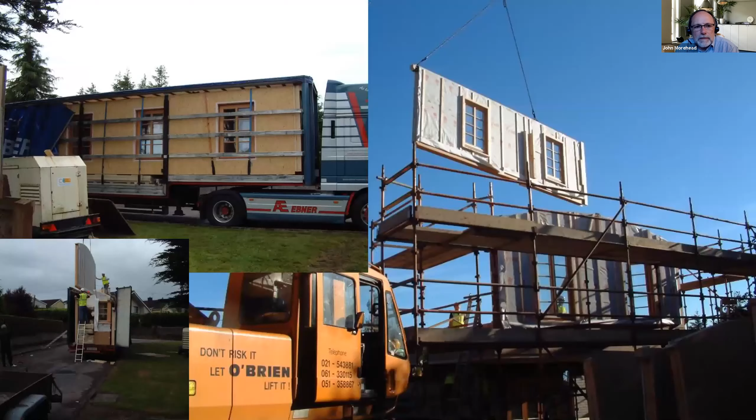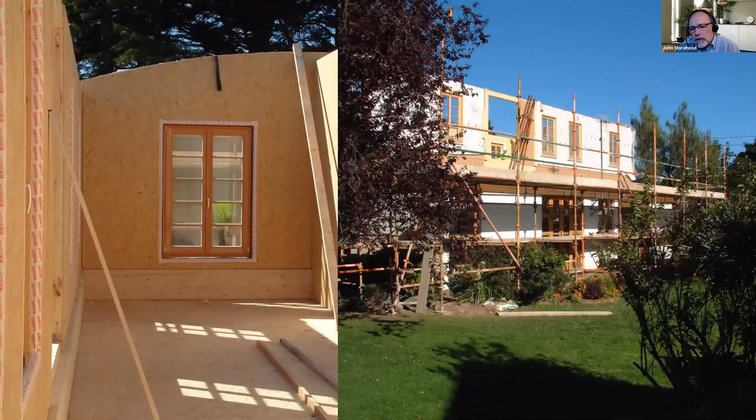It was really interesting. We were trying to get better light penetration into the building, and also look at the whole thermal performance of the building. The Austrian companies were very advanced, very knowledgeable, and introduced me to many hygrothermal principles. Airtightness, as you can see: these windows were installed prior to arriving, all airtight sealed. OSB was the airtight layer on the interior. And we actually had this building assembled in 4 days.

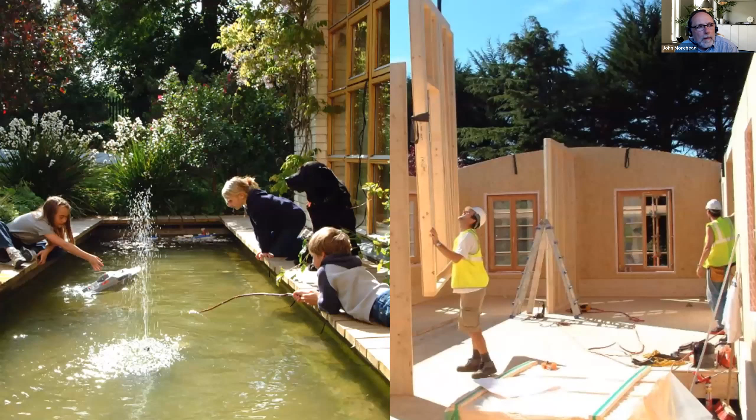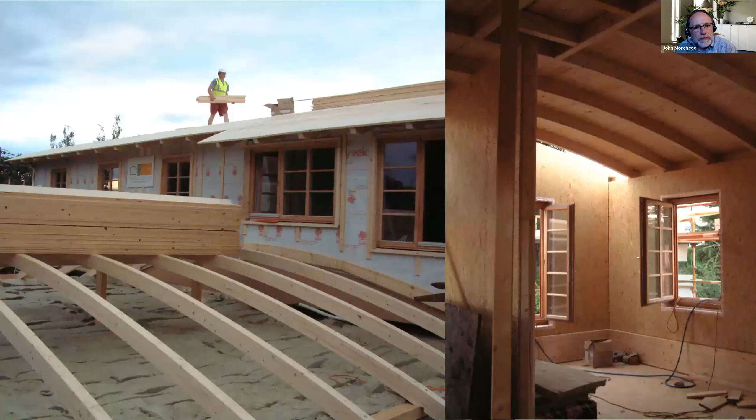It went up really quickly. We built a little pond while we were at it for the kids. A big boss came back over from Austria during the second half of the build. The kids and family went away, and 8 days later this was up and roofed and guttered. Haven't managed to achieve it ever since, but it was really quick. You can see the insulation straight down over the VCL, which is the original roofing membrane, on the single story element, and then the perpendicular 2-story element, which is timber glulam.

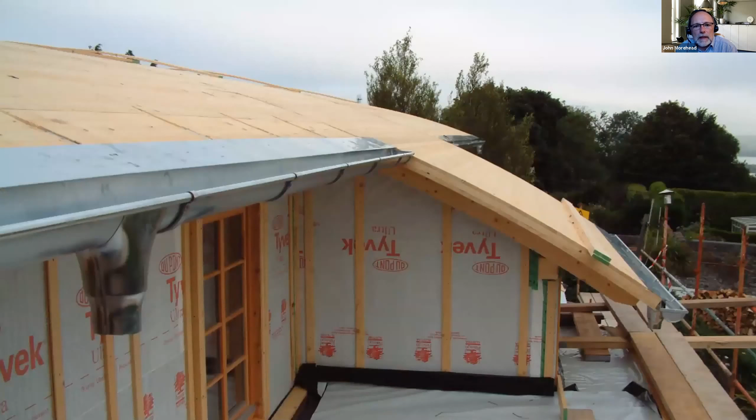Trusses there were insulated from inside with cross battens and then Proclima membranes. I think I might have a picture of that. And here you see sarking boards, the walls already prepared for larch cladding, which we did ourselves, and the aprons in for the zinc roofing on basically the hairy boards which support the zinc, and that's still the way we do ventilated zinc roofs. There's the zinc going on.

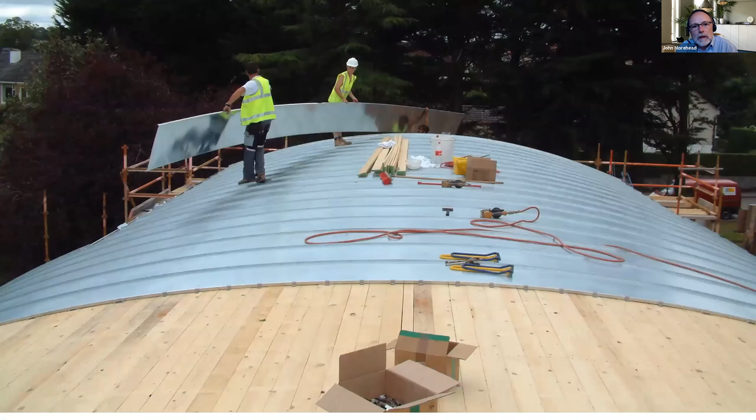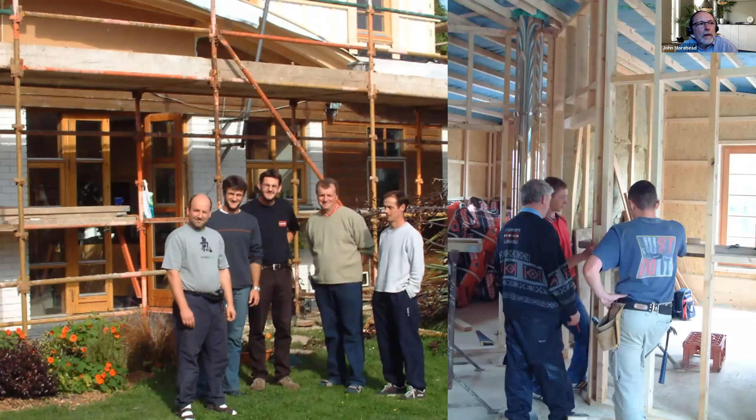We had a press on site, and this is the crew, myself in with them, the main crew from Galway and Austria. As I say, we had the building in and roofed and guttered in 8 days. And we had our local crew fitting out the interior afterwards, and that's the original AVCL Proclima. But you can't deliver any of these buildings, as we all know, in Passivhaus without a really good team, and all these guys added value to the whole process.

So then moving on to around 2003, we were doing an infill project for someone. It was again local. It was on the coast in the estuaries in Cork, not that exposed. It had a northerly view to the estuary and a southerly view into the original river embankment. So we were trying to pull sun in from the back. So it's very sheltered.

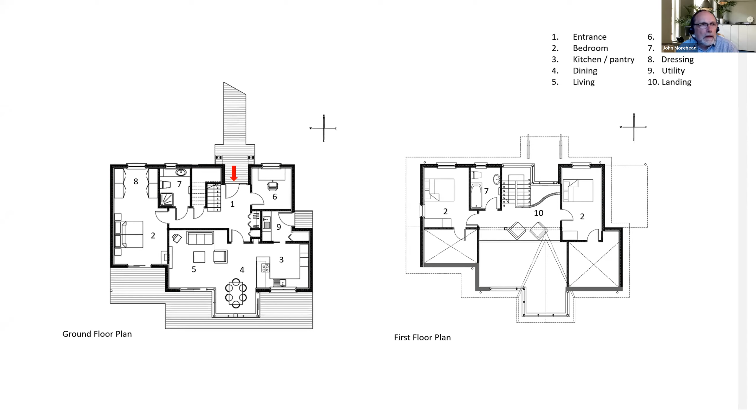With concerns, because of the amount of sun we were trying to pull in from the back, that we might get overheating at the time, we introduced stack effect into the design. So modest house, about 140 square meters. There's our stack effect ventilation built in. And you can see it just dumps on the outside.

And then we pull light into the northerly side of the house, which is overlooking the estuary where there's a lot of activity. High volume spaces we were beginning to understand really worked in buildings that were already quite airtight. The envelopes were airtight and the timber was moisture permeable. It allowed variation in temperatures and solar access during a day.

As you all know, we have 4 seasons in the one day here. It allowed that to dissipate and distribute. So the watts per square meter became very important, the heat load and how that was being addressed and dissipated. Here's the back of the house, a totally different aspect. As you can see, the high level ventilation.

During COVID, that house, which is naturally aspirated and naturally stack aspirated, never went over 600 ppm, which was remarkable. We ran a DEAP 4 calculation on it the other day, and as it is, without any PV, an A3 rating, CPC of 0.48 and EPC of 0.426, with a heating load under Passivhaus of about 17.5. So it wasn't 10, but it wasn't bad. Not bad for, say, 2005.

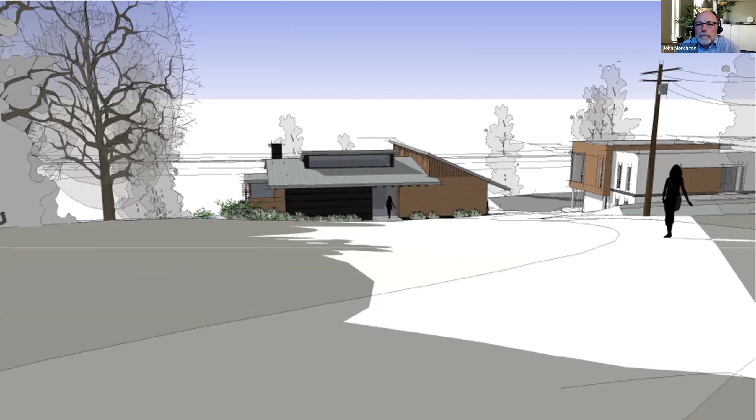This is the project overlooking an estuary, again exposed nicely to the south with excellent views down to the southeast. It's quite steep as sites go, upside down living accommodation with a basement below, which had its own issues and introduced us to hydrothermal issues that we needed to resolve.

We also challenged the building regs at the time, because remember this would have been back in 2009, so we were based on the 2007 building regs, where you had to have a fixed amount of renewables. And percentage-wise, we really didn't need them. We were going to be dumping hot water. We actually got a waiver, which was really good, and fair dues to our local building authority.

It's heated solely by towel rads and one rad in the utility room. The heat load is 9 watts a square meter. There is a post heater, but it rarely comes on. And we have underfloor pipe work, but it has never been commissioned. So the gas boiler that was installed in that house was purely really there for domestic hot water. It has a drying tower integrated with the ventilation system, and that's synonymous with most of our dwellings at this point in time.

But when we found out it was meeting the Passivhaus standard, that was based on Dublin climate data, and there's a whole rigmarole. Many of you know we beat a lot of drums at the time that we needed more climate data files. We ended up getting 4 to include Cork, and of course we do individual site climate files to get accuracy, because with any of these software simulation programs, rubbish in is rubbish out.

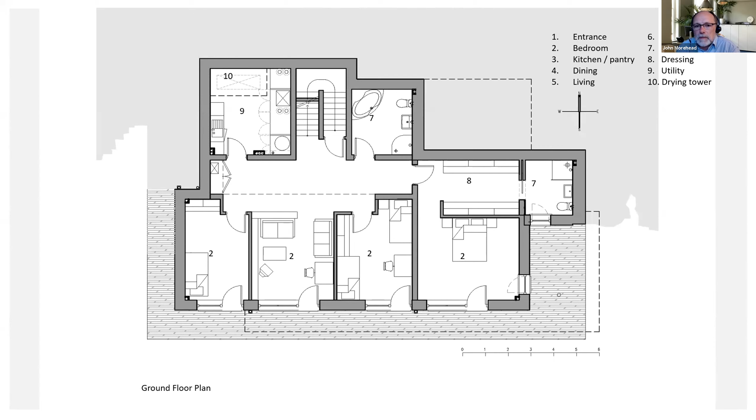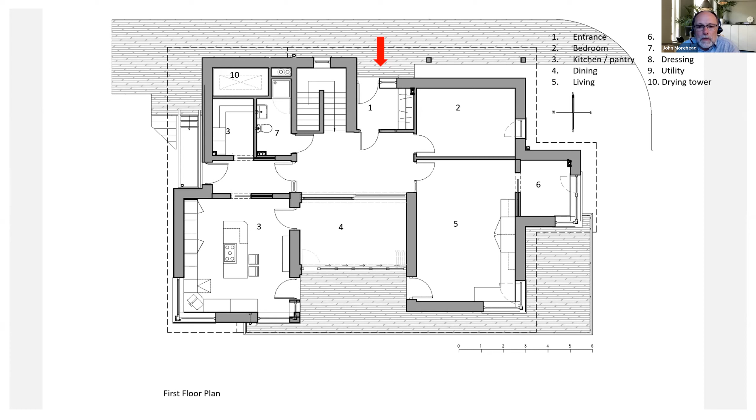Your living area on the right, off which there was a study. There's an interesting room number 2, which is on the northeast of the house, gets very little sun and had a roof light because we were worried about the amount of light getting into the room. And that's known as the pastry room, even though it operates at 20 degrees like the rest of the house does. Surface temperatures in the walls were lower. So we learned something with that. We tend not to use roof lights now, if we can avoid it.

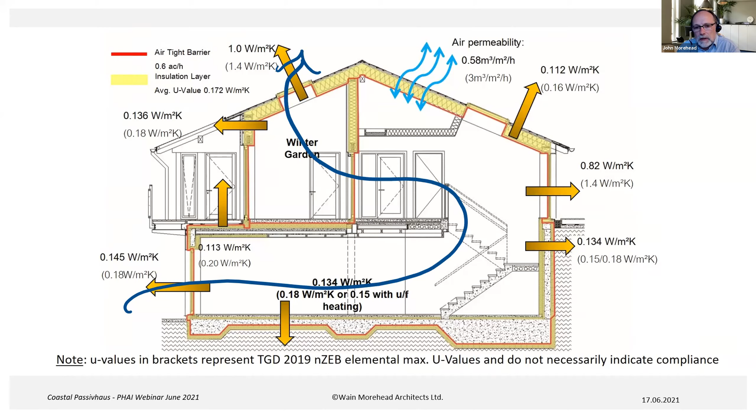On the climate side, climate on the coast is very different. There's a coastal margin that one needs to be aware of. Very good solar access generally on the immediate coastal margin, but as the cloud accumulates inland, it prevents the solar access getting further across.

And the sites, my battery's going low on my mouse. So I've just been told.

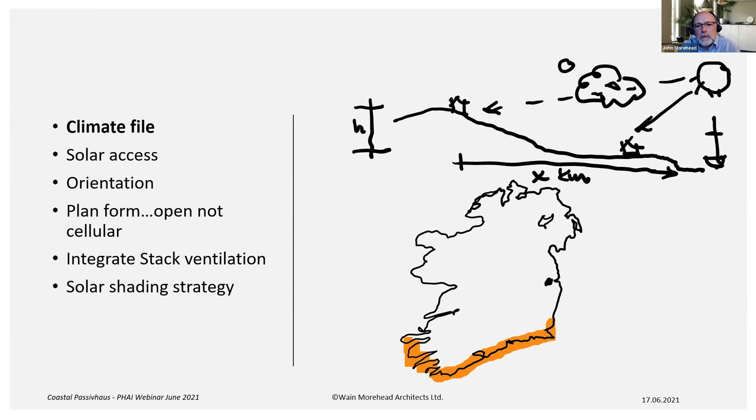Orientation, obviously critical. Generally, you want to be looking out on the sea. So sometimes that can cause difficulties in that there's a conflict between solar access and visual access. Stack ventilation works really well because you can cool off the sea. Another project some of you might see in early doodles for a project in West Cork.

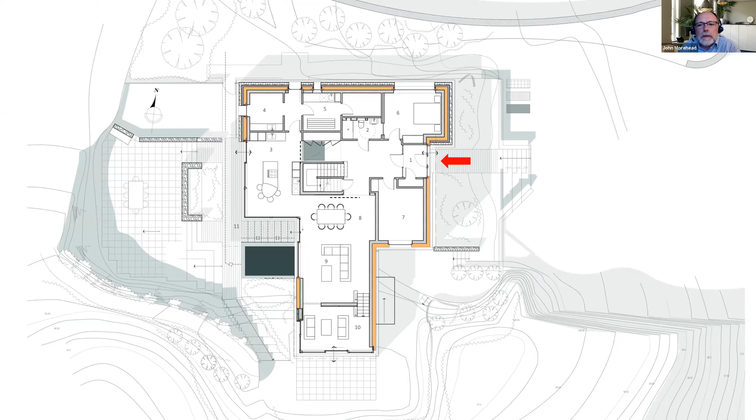All your plant rooms are on the north side of the house, and there's also a guest bedroom and a Jack and Jill bathroom. Number 7 there would be a little study tucked in a quiet part of the house. Upstairs then we have 3 bedrooms with again a communal living area, which has access out onto the terrace, with the most incredible views out to the Fastnet, etc.

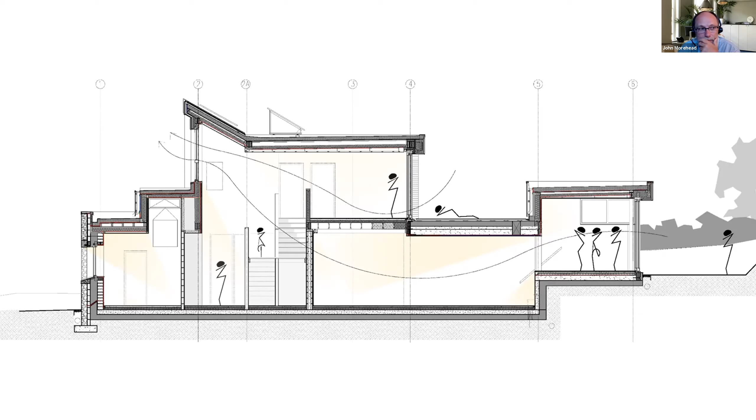We used a lot of stick-built house. We used TGIs. We were introduced to, where the steel is there, that's a Parallam, which is as strong as steel for the same sort of size and reduces thermal bridges.

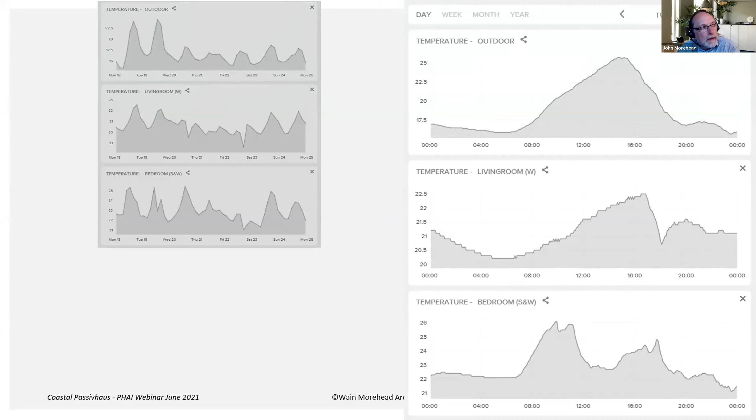We had some issues. On the left, you can see varying temperatures in a particular room, which is the bedroom. And in detail, we had an issue where we had a shed that was supposed to be built, a roll top shed. It wasn't built. We were taking in far more energy through the southwest than we expected.

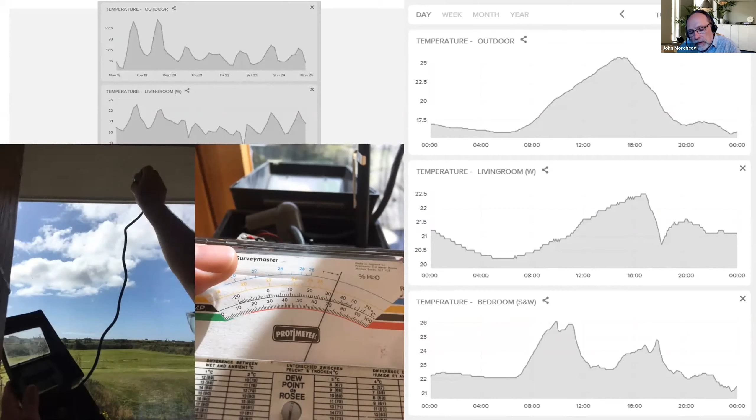We looked at putting in solar films. They were ordered to be put on the outside, but they put them on the inside. And what we're measuring here is 32 degrees surface temperature of the glass on a hot day. So what was happening was the solar film was on the wrong side of the glass and was heating up. So be wary of that.

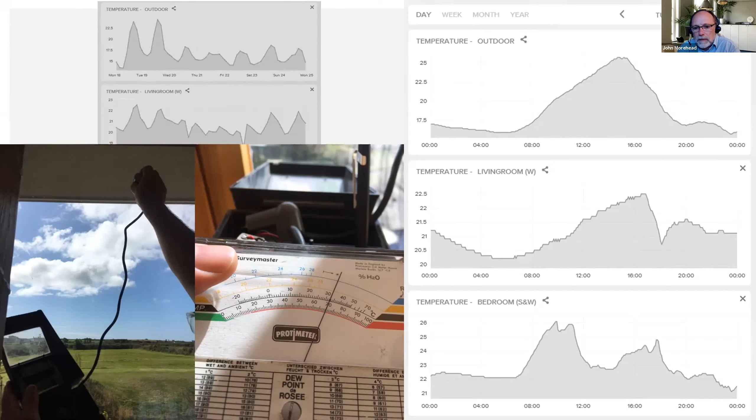We could have done more in relation to that once we knew the shed wasn't happening. We looked at our thermal bridges very seriously on that project. We did a number of different materials because we were building into rock. We got a Y factor, for any of the nerds out there, in BER terms of 0.0262. Again, all this Passivhaus just works within the architectural framework and idiom that we like to use.

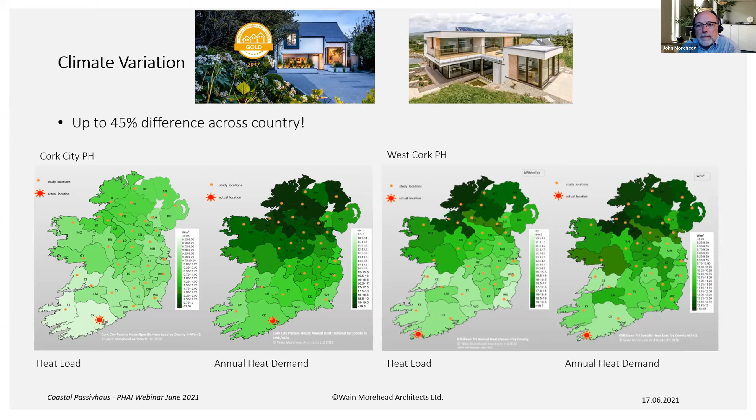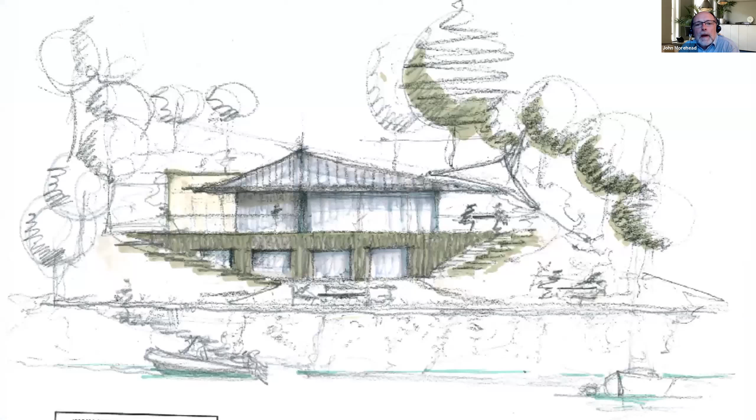It's like a pavilion built into the hill with an unusual roof. It's trying to keep low to stop interfering with views for people walking behind us. It's an amenity area, but this house is looking north, right next to this fort, which is a Georgian fort, and was extended over the years, back into the 1900s with the Navy at the time. And you can see there's rather lovely warmth in the concrete piers, jetties, and embankments. We tried to match that.

Started looking at how we would do it as we built into a hill, and found that materiality was going to become an issue, and it wasn't just Passivhaus, it was NZEB or anything you want, but our Passivhaus experience and knowledge was able to steer us as to how we could achieve a really high performing basement for a north facing house with very little solar access and yet not get condensation.

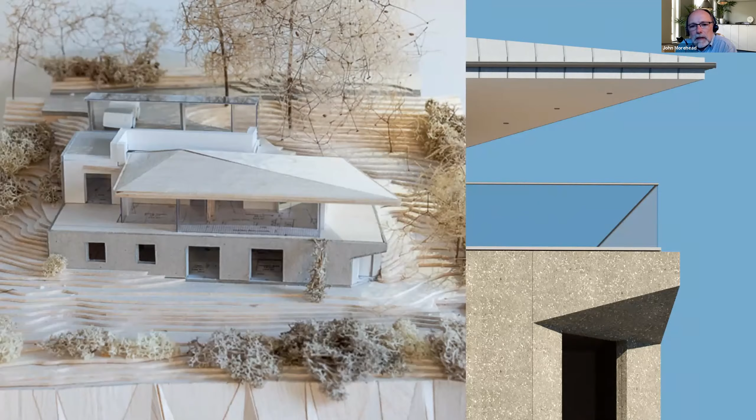This is just a render we took yesterday off our BIM model. And you can see the overall form. You can see, I can get my pointer, maybe, if I can.

No. Okay, failed miserably. Anyway, this is the terrace on the west-hand side, which is getting sun from about April, and really important. The roof covers that area, shelters it in the evening from dew, which can be a real issue near the coast with clear skies. You've got living accommodation on the upper floor, and bedroom accommodation primarily down the lower floor.

Bear with us, sorry.

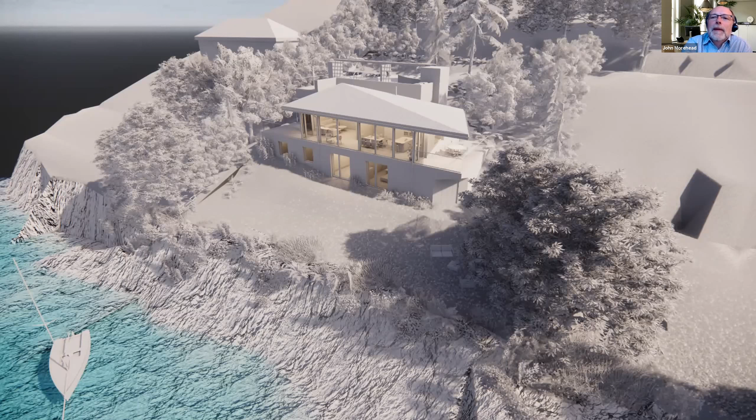Okay, I have an issue here, just bear with me.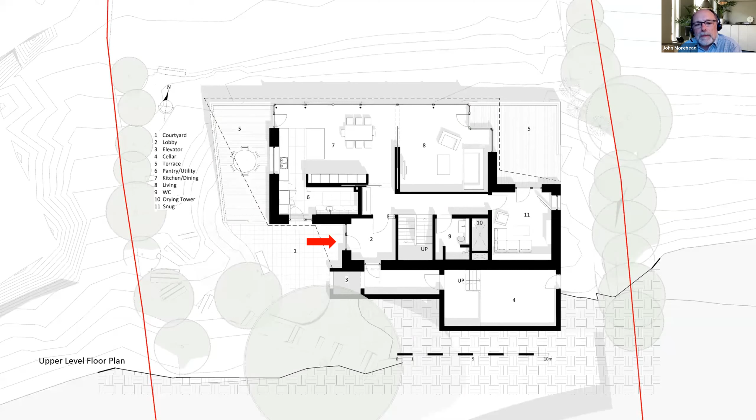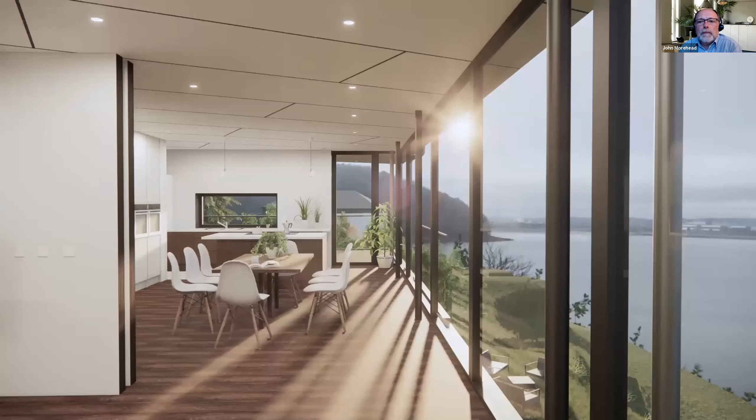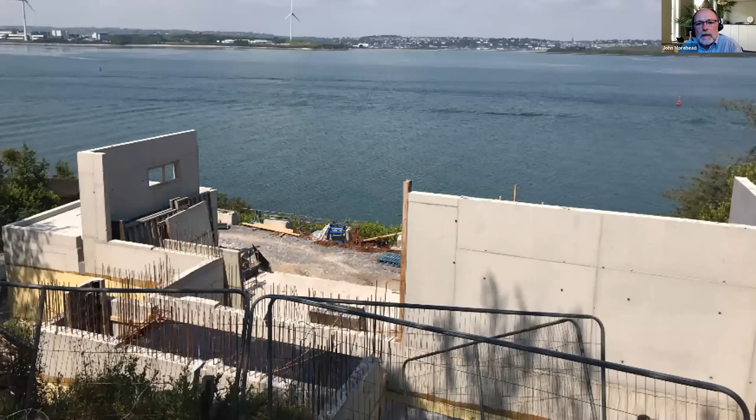Lots of concrete. We managed to get GGBS. The embodied carbon reduction was 23% for the concrete alone by doing that, which saved us a significant amount of equivalent carbon, 12,540 kg indeed. When we worked all that out, it was actually the equivalent to 9.5 years of operational carbon, which was offset by a change in the concrete spec. So you need to look at that.

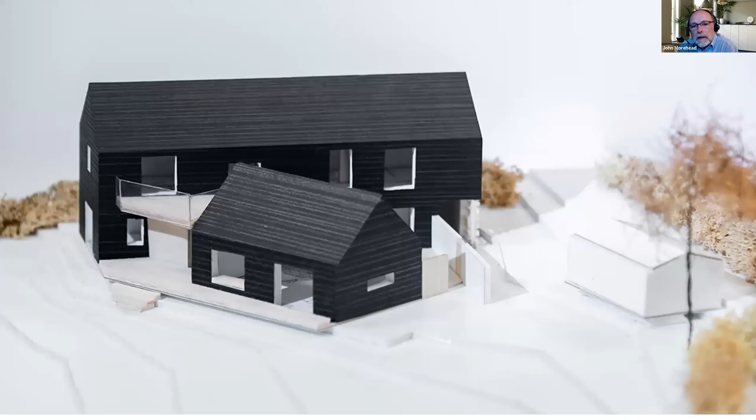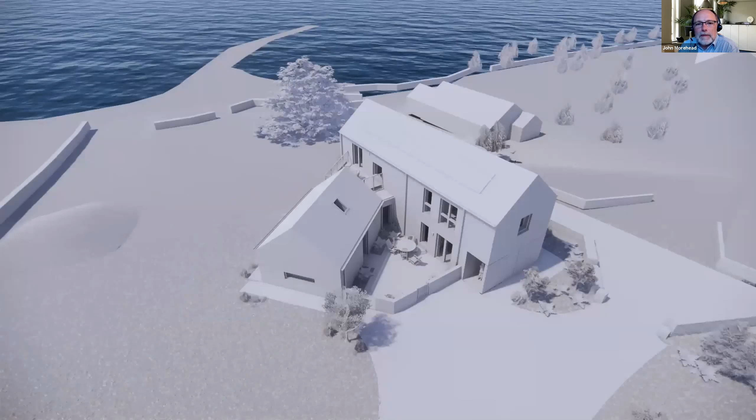It's another house that's on at the moment on site. Site has begun, raft foundation. It's actually very close to the other Roaring Water Bay project down near the pier, longhouse with again, orientation and form factor not ideal from a passive house, but we can get away with murder down here in Cork because it's so mild. This is the dwelling. Upside down again, access views. And we've got a Y factor there of about 0.022, it's timber frame.

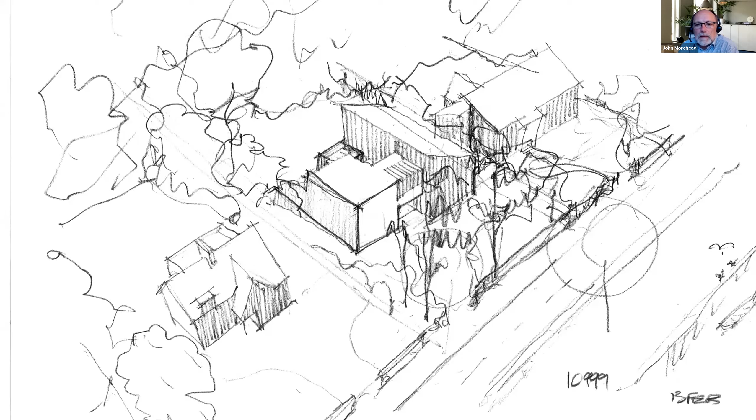Another one, which is near the first one I showed you along this area. It's in the center of the photograph. Early doodles. So you can see the low energy stack ventilated project we did in 2003, which is up in the top right. And then the center is a new dwelling. And then there's a really nice arts and crafts house to the left, and the architecture was responding to that. Again, the river's on the right, which is to the north, and we wanted to get access, view over the northern part and all the activities on the river. This area is now pedestrianised.

Got a courtyard plan form, again, not great from a form factor perspective, but brilliant for getting light in to the core of the building, particularly to the northern sides of the building. We've got a living accommodation on the left-hand side there, courtyard in the center, kitchen, and then on the northeast utility area with, believe it or not, a drying tower.

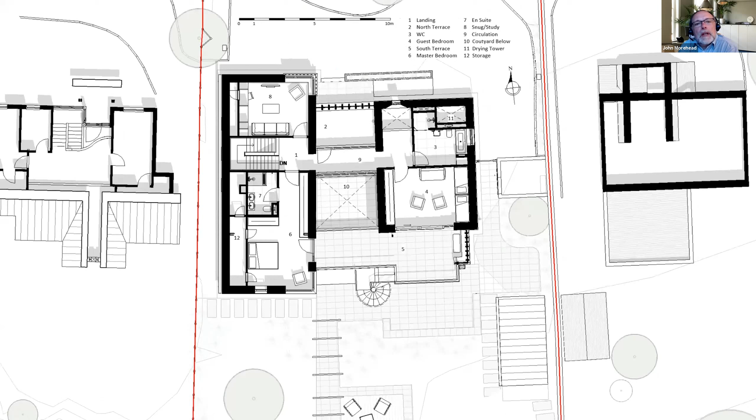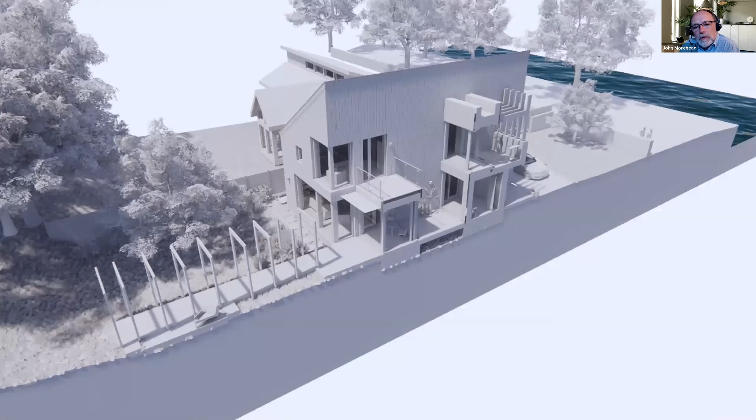And then on the upper levels, again, bedroom accommodation, study on the north, terrace there at number 2, overlooking the river. And we have an interesting concept, which is for grandchildren and kids, where they can have bunk beds and 4 people can stay in that room, and that suite effectively on the right-hand side, rather than have a series of individual rooms. It's just a cross section through the courtyard, which we'll be using for stack ventilation. And that would be a full 3D render of the back of the house.

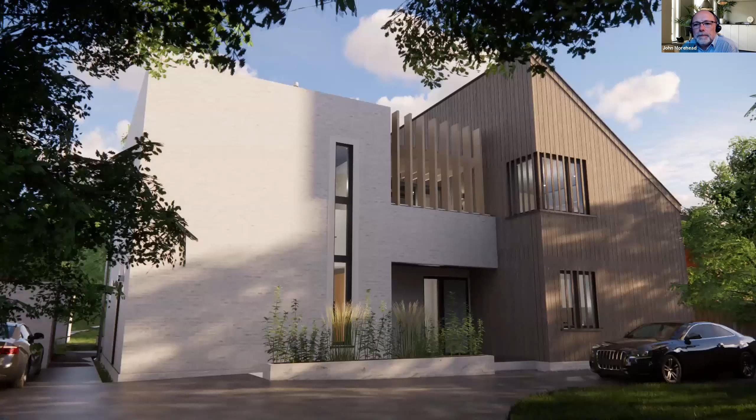Again, form factor is not pretty, but again, it's quite mild down here, and we're not having to go OTT in relation to building energy or envelope performance. It's very influenced by the property that we did to the right with the larch and the sloping and raking zinc roofs. And then we're picking up the property on the left, the arts and crafts building, with white brick clad screen system. Again, all timber frame.

We found that the large volumes that we use absorb and dissipate the heat. You get enough air, but not heat distribution through a 15-millimetre gap at a door in cellular arrangements. All our buildings have to cater for the fact that it's a hostile environment with severe winds, driving rain, corrosion potential, as I showed you. And the envelope components must meet the aggressive criteria that they're subjected to. The delivery on the coast is not just about thermal, it's about weathering and many other factors.

I suppose Passivhaus performance needs to acknowledge the desire for sea views, which can impact on building orientation. So you can't always just have no windows in the north, as we showed you there in that pavilion type concrete building. Airtight standards yield real results, and the Passivhaus levels and some of the levels our colleagues are achieving really help in this regard.